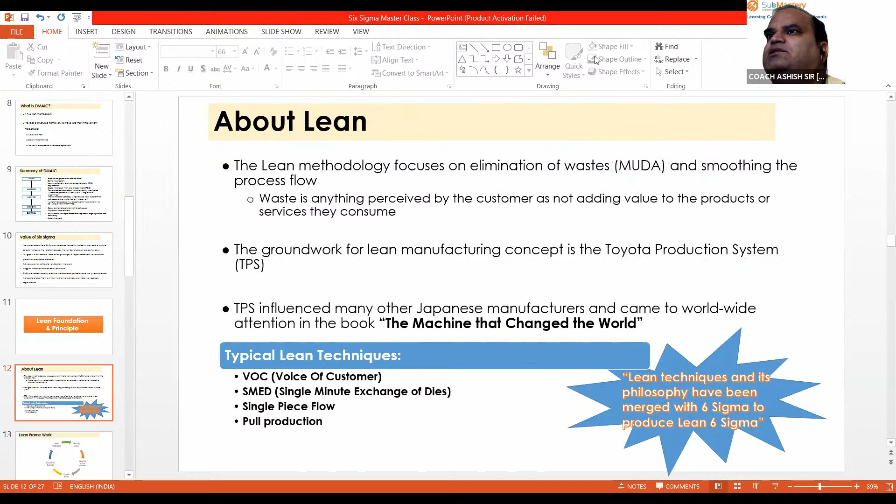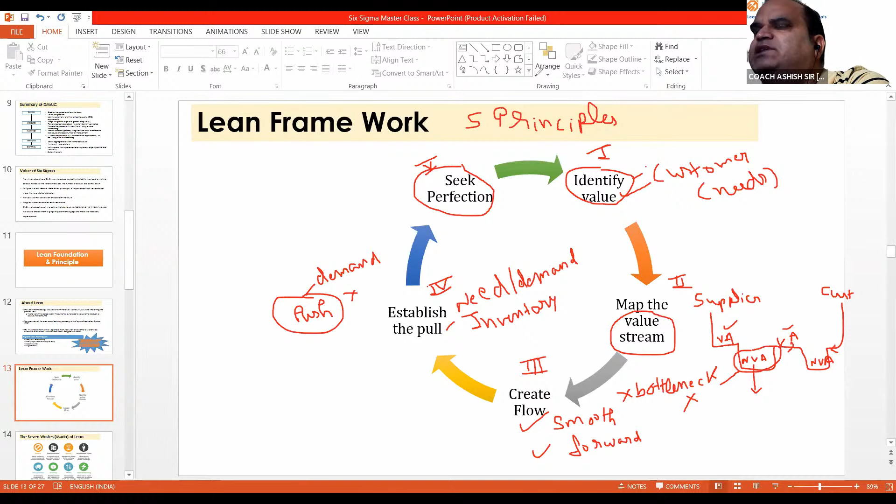This is pretty important. The final principle is perfection. This is the fifth principle. After using all these principles, you have to see for perfection, you have to see for continuous improvement. These are the five lean principles we generally talk about in the lean framework. I hope you will remember these five principles.

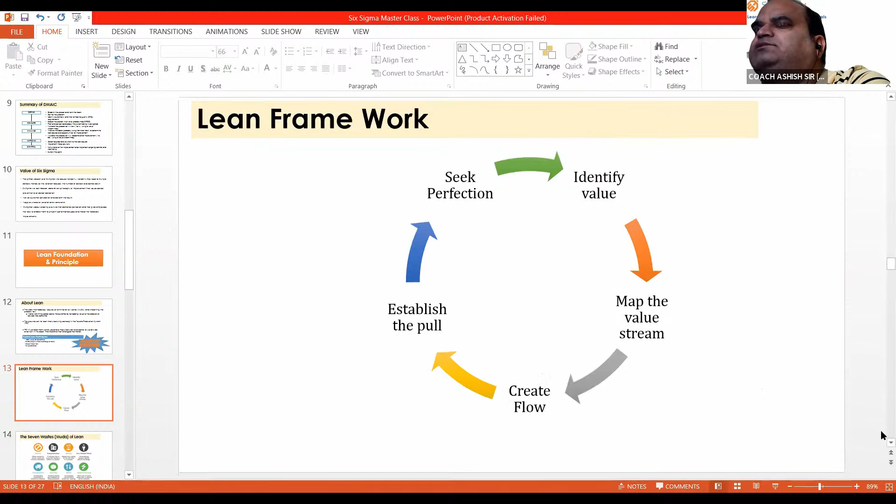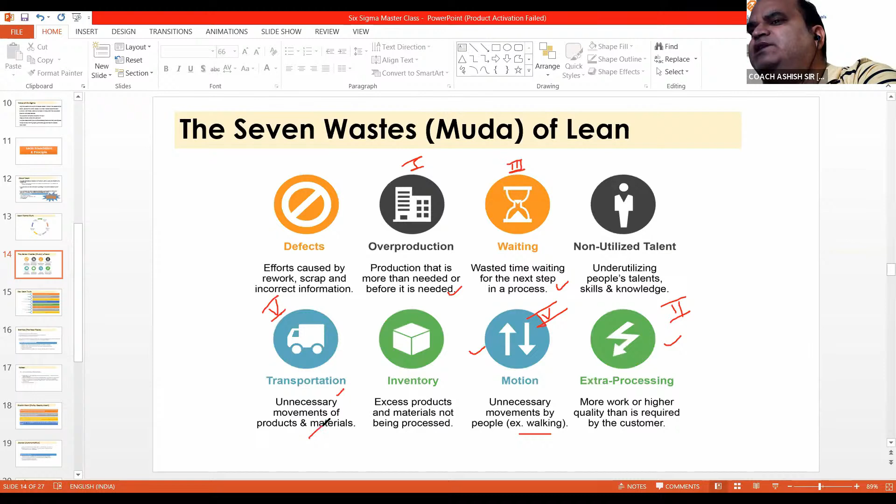The fifth one is transportation, meaning internal transportation. Unnecessary movements of products and materials inside your shop floor or company, which is again a waste of time and waste of your energy, is also known as waste. This is the fifth waste.

Sixth waste is defects. So what does defects mean?

Any effort caused by rework or scrap and incorrect information counts as waste. Suppose you are making products, and there are a lot of defective items. Now you have to reduce and remove the defects, and for this you have to do rework. Rework is unnecessary work which consumes a lot of energy, effort and time. So this is also one of the major problems - it's one of the wastes.

And guys, this one is the biggest waste in my opinion, which is the waste of inventory. There are different kinds of inventories we are talking about - raw material inventory, work in process inventory, finished goods inventory, tools and equipment inventory. According to the principle of lean, inventory is one of the biggest wastes, and according to lean principles, you have to avoid any kind of inventory. So this is also considered one of the biggest wastes.

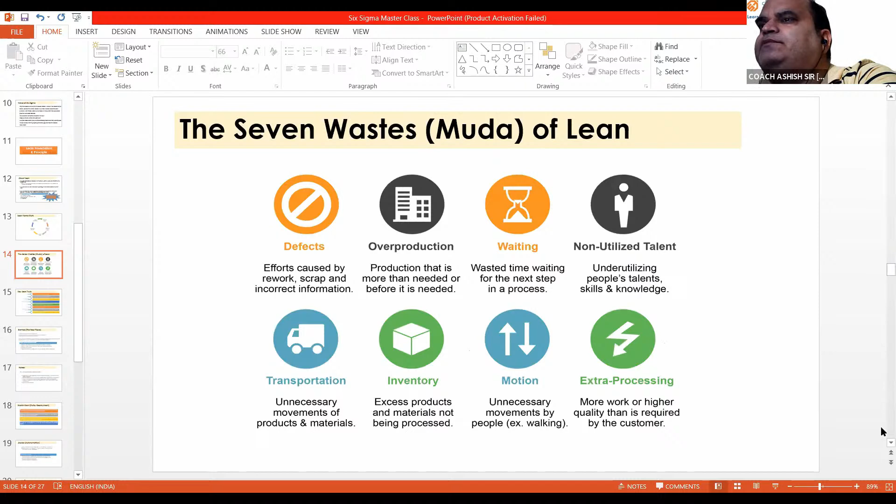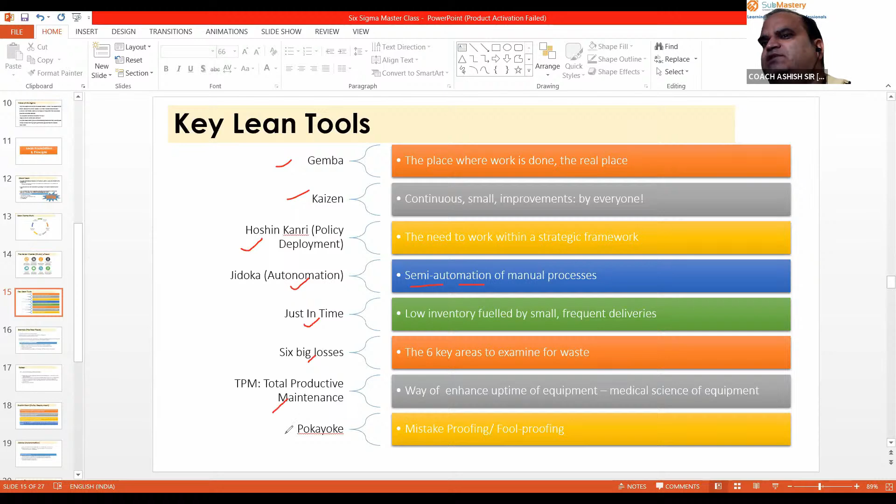And this is another technique called Jidoka, which is known as autonomation. This is a combination of manual and automation - not full automation, but a combination of manual and automation. And then we have Just in Time, six big losses, TPM - Total Productive Maintenance. So guys, these are the different lean tools generally used to eliminate these wastes.

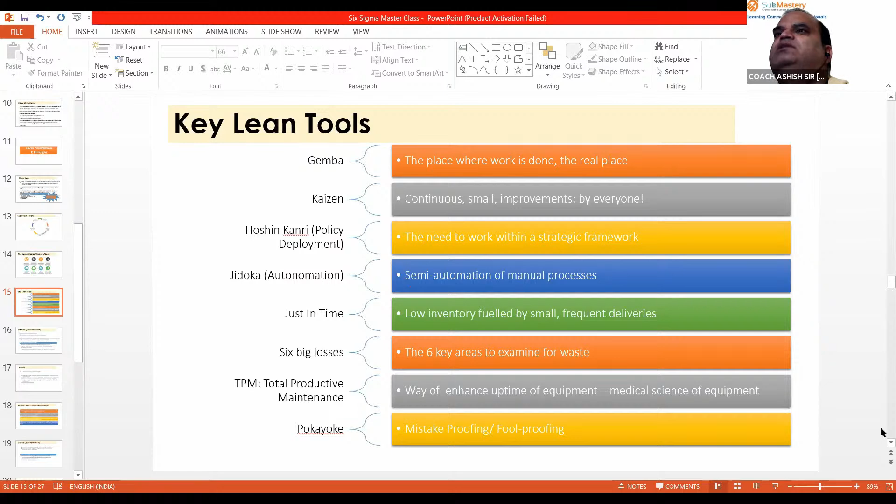What is Gemba? According to Japanese people, Gemba means 'the real place', or in business refers to an area where value creation happens, and in manufacturing it refers to the factory floor. It can also be a construction site, sales floor, etc. The idea of Gemba in lean manufacturing is that management goes to the factory floor to search and fix visible problems.

In fact, I also work as a consultant, and I've seen in a lot of industries that there are many engineers and managers who hardly visit the shop floor or the Gemba place. According to lean, it is very important and necessary that you visit your Gemba place, your place of working, so you get to know about the problems faced by the workers and employees, so you are able to solve all these problems.

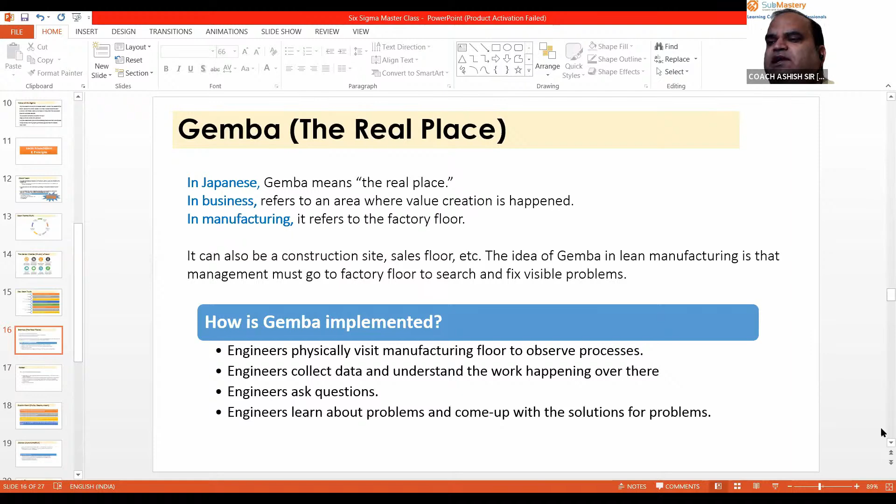So generally we talk about the Gemba walk. The meaning of the Gemba walk is that you go to your workplace, observe all the activities, and monitor all the activities.

And this is the Kaizen. The meaning of Kaizen is continuous improvement. Generally we are doing a lot of small projects, and believe me, this is a very important part of lean. If you are improving your processes through Kaizen, meaning small projects, you can identify any problem, any small project which you think can be improved, and you can do it through Kaizen.

Here you are selecting your team, your process skill team, and after that you are going to select this project and make your team, and you are going to solve this problem in just 3 days, 5 days. You are going to involve people from different departments, from different levels. So Kaizen is a very, very important philosophy.

And one thing I want to tell you, if in your company you're not having a process, if you're not having a culture of continuous improvement, then I think it's the best way to start with Kaizen.

Hoshin Kanri, guys. Hoshin Kanri again is a very important technique of lean. One thing you need to remember is that the culture in most Lean Six Sigma based industries is more open. People are more honest, they are sharing their ideas with each other, and you are not able to see anything which is hidden by people.

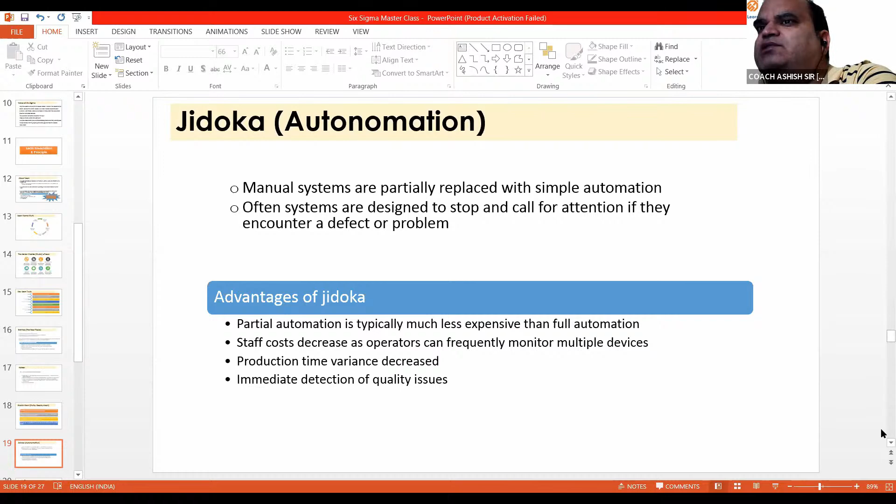Jidoka, Jidoka. It is a combination of manual system and automated system. The advantages of Jidoka: you can easily identify any defect through sensors, through alarm systems, through any system by which you can find the defect and remove it from the production line. So Jidoka is a very beneficial technique.

Just in time, guys. Just in time is again a very important technique of lean through which you can actually control your inventory, and you are able to control a lot of things. This is a very important technique for the supply chain also.

JIT, just in time, is a very simple idea that is essential in modern supply chain management. JIT sets out to cut costs by reducing the amount of goods and materials a firm holds in stock. JIT involves producing and delivering finished goods just in time to be sold, partly finished goods just in time to be assembled into finished goods, parts just in time to go into partly finished goods, and materials just in time to be made into parts.

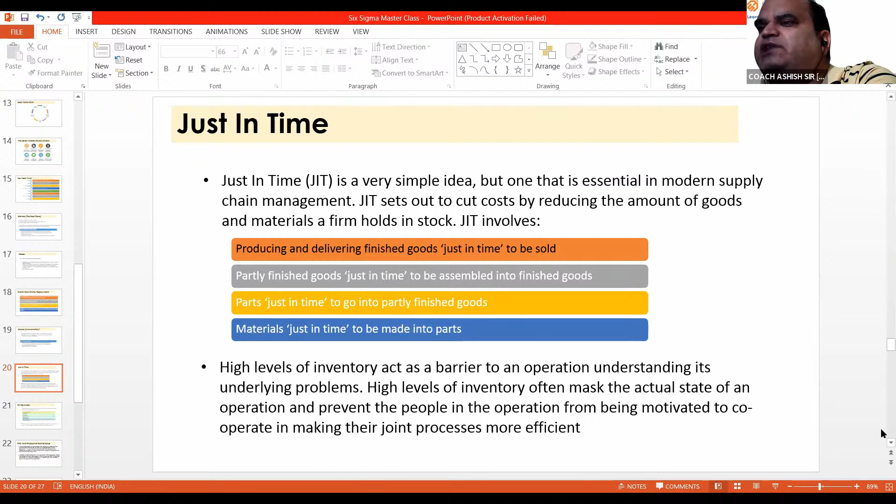So generally, we are talking about producing materials at the right quantity, and it should be delivered at the right time. These are the 6 big losses we are talking about here.

Again, in lean, for example, loss related to the setup or adjustment of your tool, breakdown - for example your machine is not working, that is also a loss. Small stops, there are small stops during your working, that is also a loss.

Your speed is going to be reduced, maybe due to some technical issues, some machine issues. Through this, your speed is going to be reduced, that is also a loss. Startup rejections - startup rejection means you are setting up tools on the machine, and there are a lot of defects which are produced in the starting phase.

That is the startup rejections, and production rejection means the overall rejection which is done by the overall production. So these are the areas, guys, and you have to focus on these 6 big losses. If you are focusing on these, then definitely you can control a lot of things.

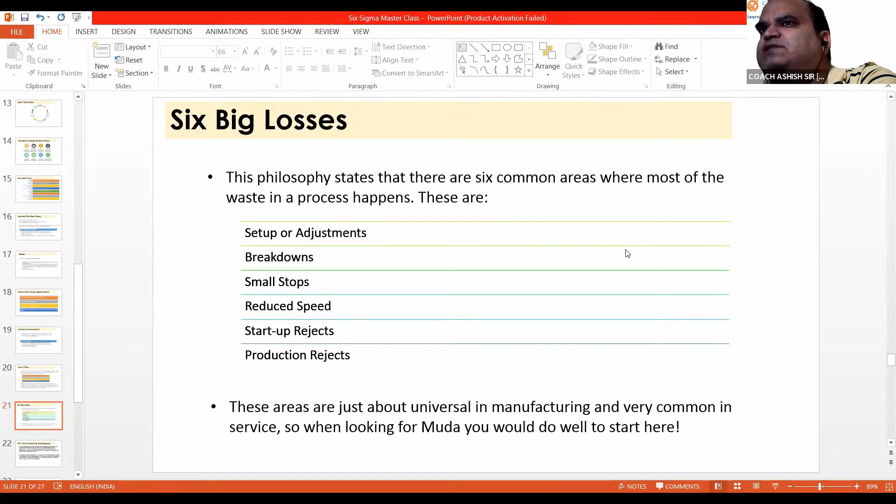TPM, total productive maintenance. This is also a very important technique, and according to this technique, you have to focus on proactive and preventive maintenance to maximize the operational time of the equipment. So according to TPM, maintenance is not only the responsibility of the maintenance department. It is the overall responsibility of each and every department.

You are actually going to involve different people from different departments, like operators, supervisors, production people, manufacturing people. They are also responsible for the maintenance. You can give authority to your operators so they look after the maintenance of the machines, doing all the cleaning and greasing on a regular basis, and looking forward to maintenance for all their machines and machine parts. So this is just a shared responsibility for different people in the industry.

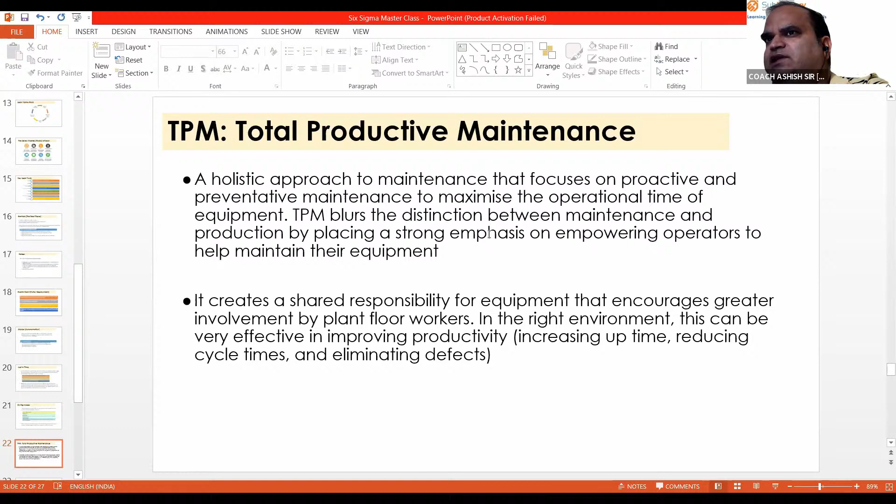Poka-yoke means mistake proofing. It's a kind of technique which is very important just to prevent any mistakes. You are actually developing such a system in your processes that you cannot allow any error or any defects there. For example, you are producing some jigs, some fixtures, such that no defects will be allowed.

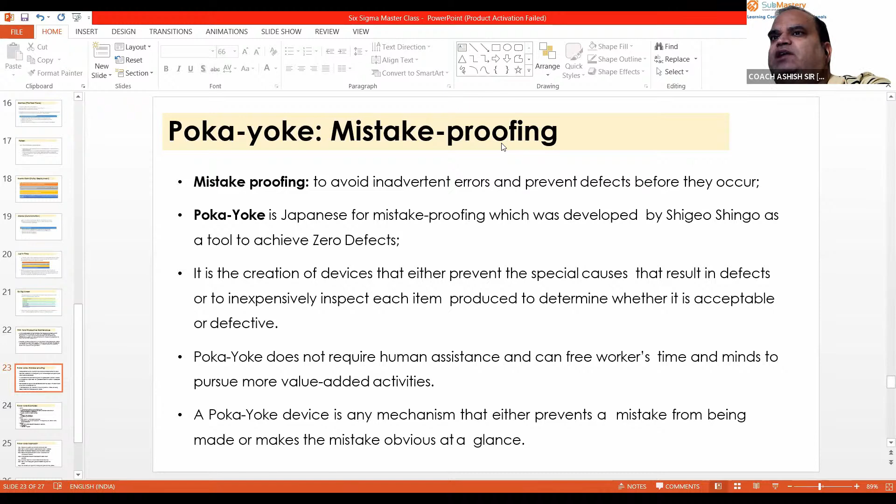For example, you are using a petrol car, so you have to make sure that you should not fill up diesel in the petrol car, or petrol in the diesel car. How can you make sure? Maybe you can change the design of the nozzle, or maybe you can label the petrol car or label the diesel car. This is the way you can actually make sure that no mistake should be allowed, no defect will be allowed. That is known as Poka-yoke, or mistake proofing.

These are the examples, guys. For example, in the home, automated shut-offs on electric coffee pots, ground fault circuit breakers for bathroom or outside electric circuits. In retail, you can see tamper-proof packaging. In the office, also spell check in word processing software. Like for example, you are using Grammarly software, which is checking all the grammatical errors and spelling errors. That's an example of Poka-yoke, that no grammatical mistakes will be allowed.

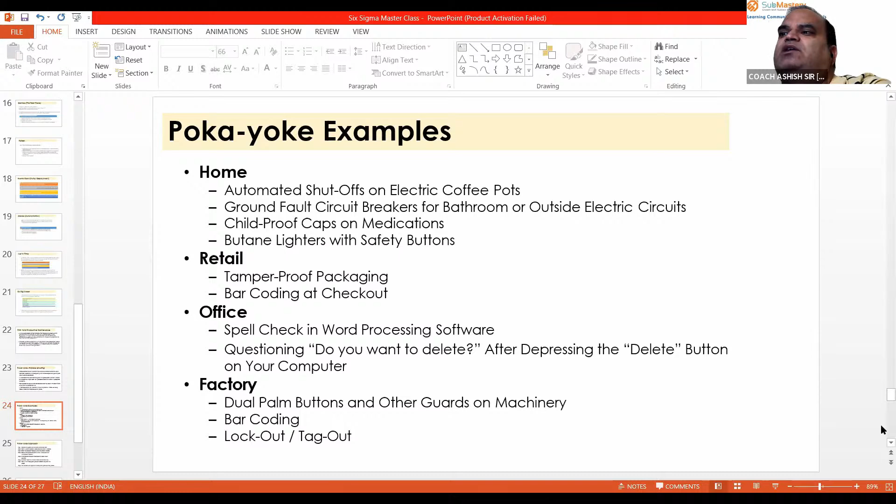So these are the approaches of Poka-yoke. You can also apply in your processes. First of all, you have to describe the product or service defect and collect your data. Second step, identify where the defect is discovered and where it is created. Third step, detail the standard procedures where the defect is created. Step four, observe the process and identify errors and deviation from the standard procedures.

Investigate and analyze the root causes for each error or deviation, brainstorm ideas to eliminate or detect the deviation early, and identify the mistake-proofing device necessary to prevent the defect. Finally, you have to test, validate, and implement mistake-proofing devices in the process. These are all the approaches.